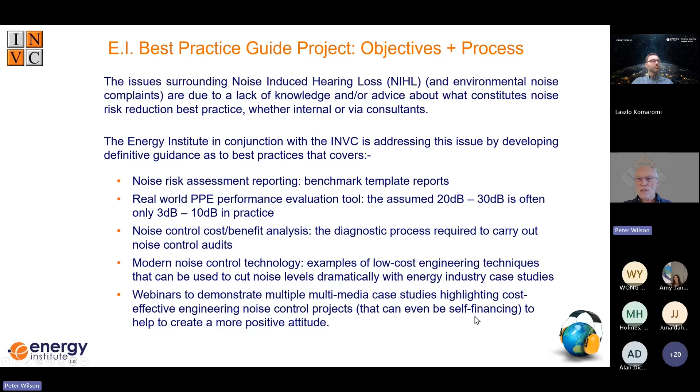Carrying out a cost-benefit analysis based on diagnosis—virtually nobody does that. And I'm going to be talking about examples of low-cost engineering diagnosis and technology that can be used. We'll also be launching webinars to transfer this technology and approach in-house.

It's time to move into the 21st century because at the moment we're still working in almost Victorian technology. There's a massive amount of urgency because of a 700K hearing damage claim recently—this is set to become more commonplace. The HSE noise inspection focus over three months has produced a 300% rise in enforcement notices. They are pushing because of new research showing how damaging noise-induced hearing loss can be.

And PPE—the assumptions about PPE are just wrong. If you're much above 90 dBA, you are in trouble as far as guaranteeing adequate protection. And environmental noise complaints are a big health risk—it is policed, and the health implications are severe.

Just to give you one case study, which I'll talk about briefly later—we did a project in the States for a big site, an oil processing site. They had a quote of $1.25 million for conventional noise control, and remotely, over email, we saved over $1 million by basing the approach on diagnosis and modern technology. And in some cases, you can actually improve efficiency and reduce running costs, which is a real novel idea.

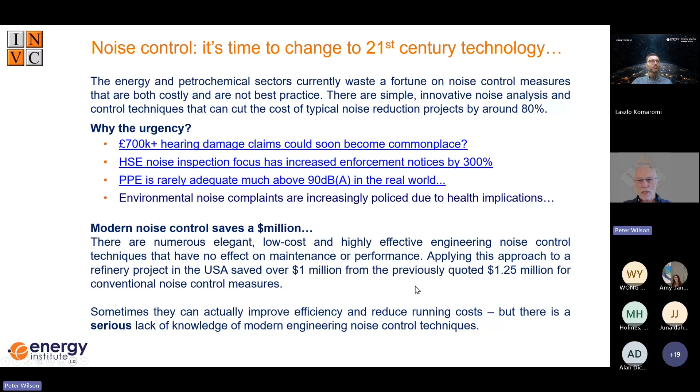So I'm going to be talking about the driver for the urgency, and then diagnosing the options, engineering techniques, and case studies. So first off...

I have to state I've got a personal interest here because my father was an army officer and he had significant hearing damage. If you have severe hearing loss, you have got 5 times the risk of dementia. And my dad died of dementia caused by his hearing loss, almost certainly, from when he was an officer in the army.

Hearing loss is the primary modifiable cause of dementia. This is based on recent research. We have a tsunami of dementia cases coming down the line, and hearing loss is a major factor in that. This is so depressing - my mum is currently dying of dementia as well. It is a horrible thing, and hearing loss is a major factor in this.

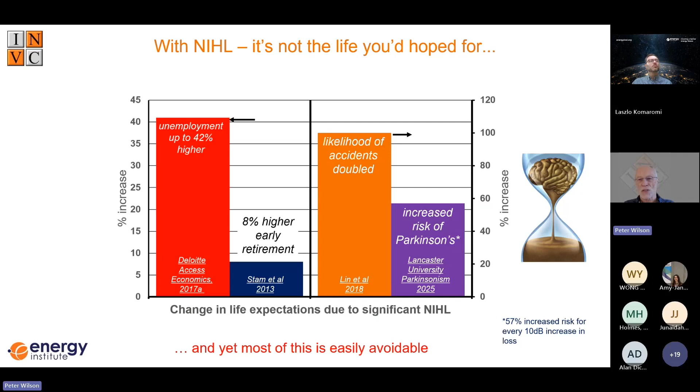Secondly, recent research shows hearing loss causes up to 42% higher risk of unemployment, 8% risk of earlier retirement, and doubles your likelihood of an accident. This year in January, recent research showed that for every 10 dB loss - which is almost undetectable using conventional audiometry - you have a 57% increased risk of Parkinson's. And Parkinson's is the fastest growing neurological disorder. So that is dramatic, and it's all based on recent research.

The second thing is that there's a new legal framework. Based on that, there was a recent court case, Ministry of Defense, and the judgment took into account the difference from the previous legal framework, which said you're not allowed to include anybody exposed below 85 decibels. Secondly, you based it all on pure tone audiometry. And thirdly, they didn't look at all the health risks.

Due to the fact that recent research has dramatically increased the known health risks specifically created by noise-induced hearing loss, you combine all those, and what the judgment said was: look, you should have known that your PPE was ineffective. The manufacturer's data was fine, but the real world data is much, much less. Currently, a part of 3M in the States is looking at hearing damage claims of over 100 billion dollars due to mis-selling of their earplugs into the armed services. That's absolutely massive - they must have known that the real world performance of their PPE was a fraction of what they said it was. Plus, the judgment also took into account synapse damage.

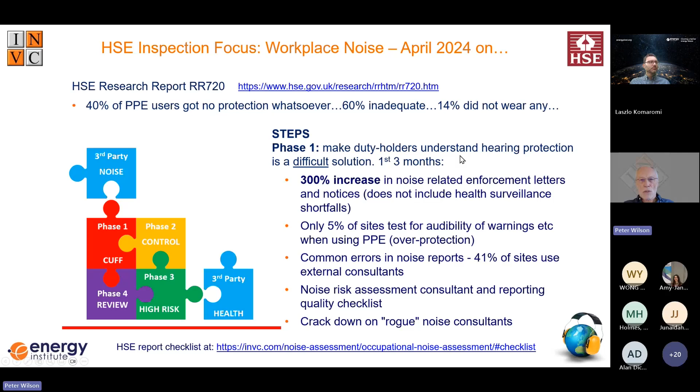There's an HSE report checklist for noise reports and so on, on our website. It's not available on the HSE website as yet, but I'm part of the committee, so we put it up on our website. Looking at PPE, part of what you get with this program is we have developed a real-world PPE performance calculator.

You answer a few questions - in this case, muffs, attenuation, wear rates, fit training, safety glasses, etc. The manufacturer says 24 dB. In fact, you're probably getting 5 dB. So this will be part of what people participating in this get.

Fundamentally, earplugs are rarely fitted correctly. So you're assuming 15 to 30 dB, and the lowest - 2 dB - is common. Earmuffs have less variation in fit, but you're talking about 10 to 17 dB. The wear rate should be 100%, but no one ever knows what the wear rate is accurately. And unless you know that, you're doomed - you have no idea the protection you're providing for people.

What that means is, our rule of thumb is up to 90 dB, because you should have compulsory hearing protection between 80 to 85, as well as above 85. The regulations don't state that, but with the new legal framework, they're now including people exposed below 85. So best practice would be compulsory hearing protection at 80.

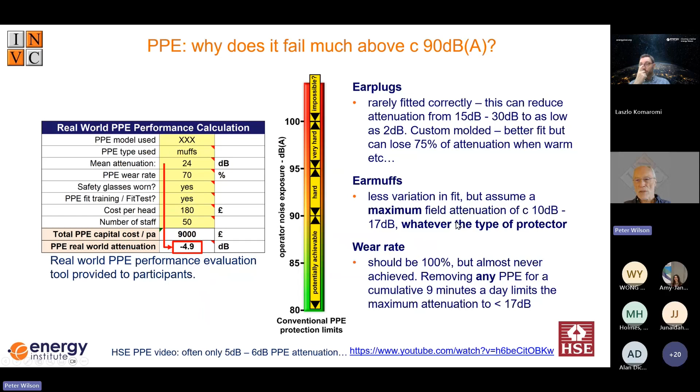As you go above 90 dBA, it gets very hard to guarantee protection. Above 95, extremely hard, and above 100, pretty well impossible without unbelievably strict conditions. There's an HSE video on this, which will be provided as part of the post sending out this presentation. They're showing 5 to 6 dB attenuation under most conditions for an awful lot of common wear conditions.

So looking at the process and the attitude, it's complicated. Some sites are incredibly complicated. And the key is diagnosis.

Some of the diagnostic techniques we use, first of all, narrowband frequency analysis. This should be standard, but isn't, for no apparent reason. I set up INVC 40 years ago. One of the first things we did was buy a narrowband frequency analyzer for diagnostic purposes. It cost the same as a car. You can now do the same with a free app, and there's information about one of the free apps that we found works very well on our website. This is a necessary tool for anyone involved with noise.

Third octaves are a waste of time. This allows you to be very, very precise about an awful lot of noise problems.

We also use acoustic cameras, which can pick up noise sources remotely without having to climb a chimney. And there's also something that probably you don't know about. This is a normal video of a compressor.

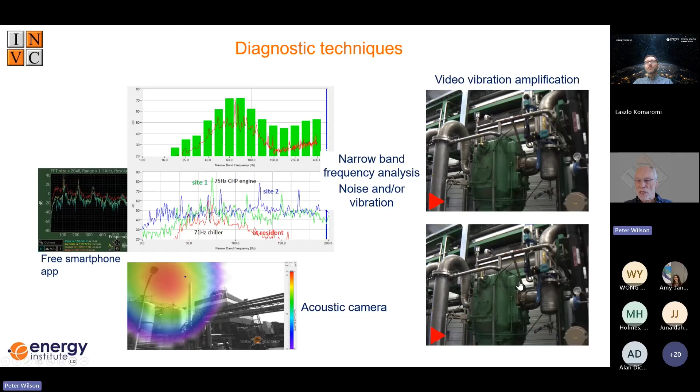If you look here, you can just see this handle wobbling. This is enhanced vibration amplification from the same video, and you can see how everything is vibrating, and you can see the patterns of vibration. Another very useful diagnostic tool.

There's massive misunderstanding associated with noise control. Hearing damage risk is directly proportional to noise dose, the amount of energy fed into your ears. Every time you double the energy, you double the risk. A 3 dB increase in noise level is double the energy, therefore it is double the risk.

An awful lot of people think that unless you can get the noise level below 85 or 80, there's no point in doing anything, because you still have to wear hearing protection. But if you cut the noise from 97 to 94, you still have to wear hearing protection, but you have halved the risk. 6 dB off is a 75% reduction in risk.

10 dB off is a 90% reduction in risk. So if you reduce it from 97 down to 87, you still need to wear hearing protection, but now your hearing protection will work, and you have reduced the risk by 90%. You document that, and the HSE will love you.

And also, there's this assumption that it's not going to be practicable, and all the cost, because of abysmal lack of knowledge. This is one of the big elephants in the room.

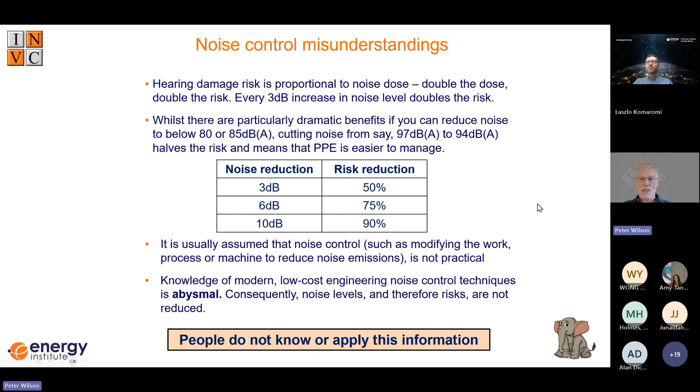The other thing is the hierarchy of control. All health and safety is based on this. This is what it should be: noise control at the top, PPE at the bottom. For noise, it's reversed. PPE is all that's assumed in almost every case, and noise control is right at the bottom due to attitude.

So our reports always have a noise control audit in there. Is this included in noise reports? Almost certainly no, it's unbelievably rare. The best you get in most noise reports about noise control is, wouldn't it be a nice idea if you could work out some way to reduce the noise?

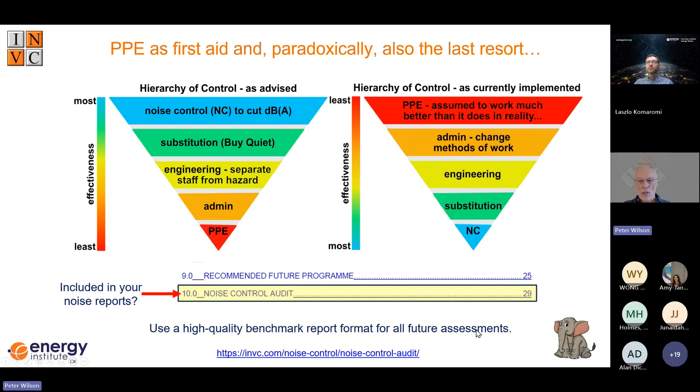And you do need to use a high quality benchmark report format going forwards. If you carry out a noise control audit, which is a diagnostic evaluation of all the noise control options, engineering and the conventional palliatives, you come up with something like this.

You have a return on investment. So you know what the noise control will cost and what the benefits would be in reduced risk, and you can compare that to the costs of your PPE risk reduction program.

In this particular site, over 6 years, in red, we have the cost of PPE. So after 6 years, it's 93K cumulative. For noise control, you're talking about a massively reduced cost, 40K. So the crossover point is 2.5 years. The financial people would love this, 2.5 year return on investment. After that, we're in profit.

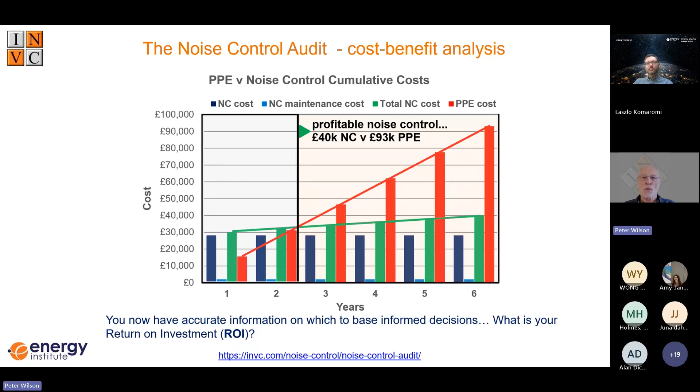But you need that information. You need to know what the options are based on best practice and what they're likely to cost and what the benefits would be. It's all return on investment. This is a real case study in the States showing you how lack of diagnosis causes dramatic problems.

This cost Atlas Power $5 million on a completely wasted project on noise control due to a lack of a 5-minute diagnosis. I saw this video online.

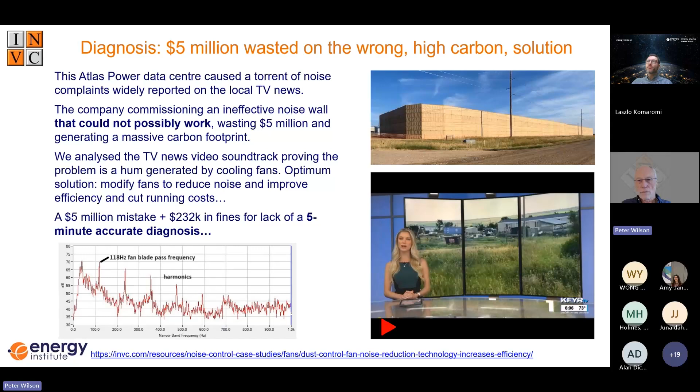The Atlas Power Data Center near Williston was granted a temporary 60-day certificate of occupancy last week after resolving several violations. Now, Williams County commissioners are watching closely to see if the company follows through on a promise to solve the excessive noise pollution in the area. Michael Anthony has more on this developing story. Could the Judson Township finally get some peace and quiet out here? Well, Atlas Power has purchased several sound walls that should be installed sometime next week.

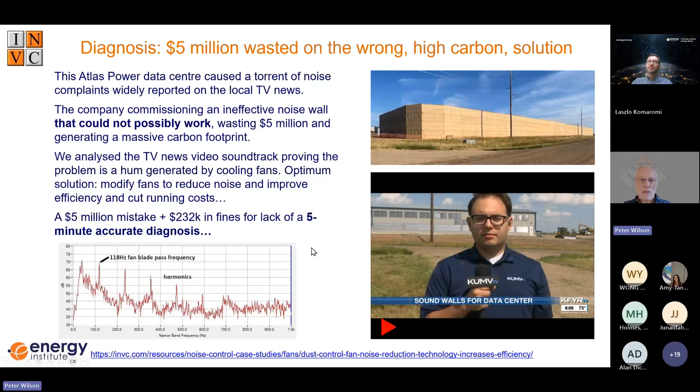I analyzed the soundtrack on that video. 5 minutes later, I said, this is the blade pass frequency of the fans. That barrier cannot possibly work because it's a very low frequency noise, and the dBA is not the problem. So a lack of diagnostic capability or approach cost them $5 million plus a 232K fine for noise. Those are the consequences of not doing the diagnosis. So if you knew what was possible, what could you achieve?

Did you know you can cut fan noise at source without silencers and increase fan efficiency in quite a lot of cases? There are also new metamaterial barriers. I've been involved in the development of these. They've got holes in them, which allow the air through but not the noise. Extremely clever and very sophisticated, but very good for cooling, for example.

Pneumatic noise, compressed air - you can get 90% reduction in air noise using 20% less compressed air. So why wouldn't you do that? You do that even if noise wasn't a problem, because it saves on very expensive compressed air.

You can also get everything proof - waterproof, acoustic absorbent, which is hygienic, weatherproof. We use that in pharmaceutical and confectionery industries as well as outside. So where you need to clean things, you can now do it. It's not just rock wool and fiberglass.

One of my favorites is sound damped steel laminate - it looks like steel, sounds like rubber. Here's an example of that. This is rugged, it's cheap, and you can create it in situ or buy it off a company in Newcastle. So 20 to 30 dB reduction, it's hygienic, it's very easy to use, and it's very, very cheap.

There's also knowledge about things that are available. Now, I may be very sad, but I love this next one. You'd think, is sellotape noisy? Well, if you've got a packing machine and you're pulling off sellotape from big rolls fast, you can get over 100 dBA. Now, the manufacturer was saying install enclosures costing you 25 grand per machine. We came along and said, you can do this.

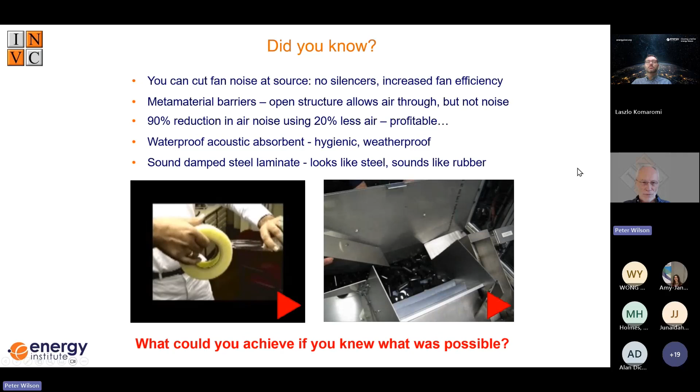Okay. I think whoever developed that, it was genius. You know, maybe I should get out more, but I think that's brilliant.

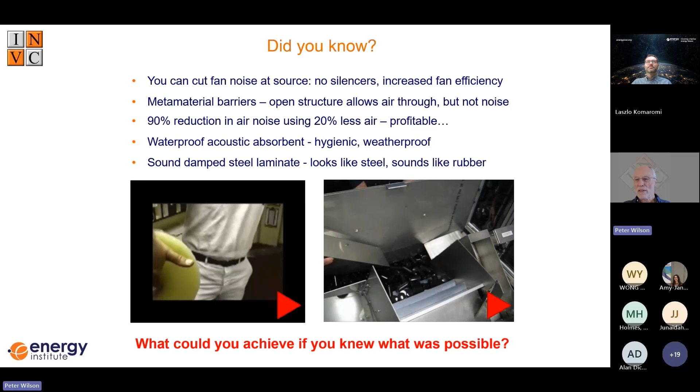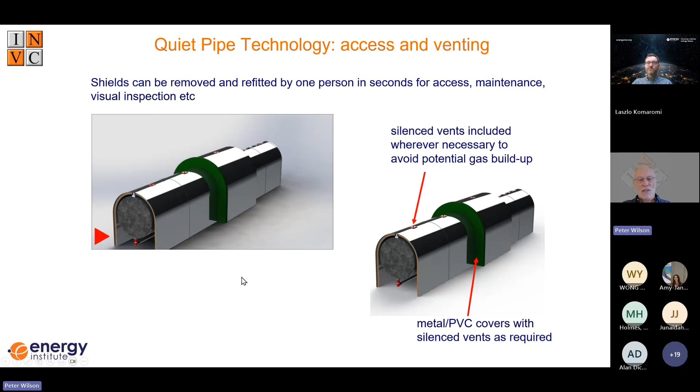And the other thing is this exact same approach reduces carbon footprint. We call it the Green Peace dividend. It's the same diagnostic approach. And what you're doing is you're swapping a bludgeon, such as an enclosure or a barrier or lagging, for a scalpel that asks what is the cause of the noise and can I fix that using engineering means?

This cuts typical noise control project costs by 50 to 80%. If you can get the noise low enough, you get rid of the waste from earplugs and muffs. Noise control structures, conventional ones, are large, using a lot of embodied carbon. The materials used, such as rock wool and fiberglass, are not easily recycled.

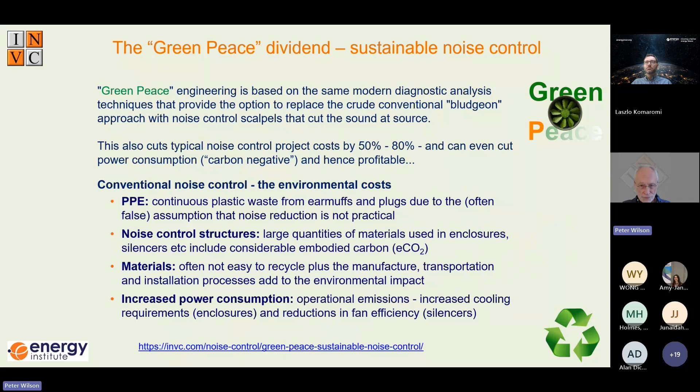We generally try to recommend recycled PET bottles as acoustic absorbent and try to use as minimum as possible to minimize cost and to minimize carbon. And also, fitting something into an enclosure probably means you need to add fans and cooling, which has increased running costs and reduced efficiency and more carbon.

It's based on diagnosis and source control technology wherever possible. If you cannot do that, then you fall back on the conventional palliatives. So you're trying to cut embodied CO2. These engineering modifications are generally manufactured locally, so you lose the transportation costs.

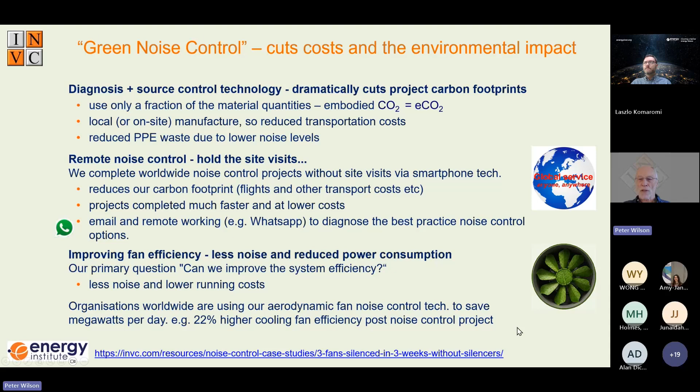We're also doing an increasing proportion of our noise control projects virtually. We do this using smartphone technology all around the world, which is faster, reduces our carbon footprint, no travel costs, no flights, no nothing. We also do remote site visits using WhatsApp. And as I said, you can improve fan efficiency in some cases, and that reduces noise and running costs. Our current record is 22% reduction in cooling fan power consumption for the same cooling.

Acoustic modeling, we do this, and a lot of organizations do this. This is an offshore rig installation model, predicting noise levels in advance, and the same for environmental noise. The problem with most models is they're all based in terms of mitigation on only barriers, enclosures and silencers, not on engineering means, so they're very limited in scope in terms of mitigation.

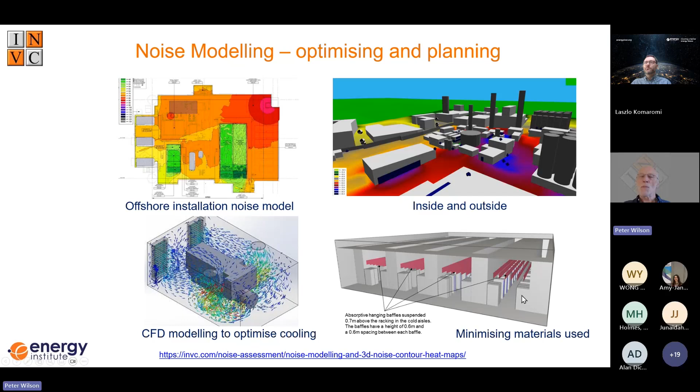We also do things like CFD modeling to optimize cooling. This is a diesel generator set. Where do you put the fans? Can you reduce the size of the fans? Instead of having 4 fans, can you just have 2 fans? And this is from a data center where we're trying to work out what's the minimum amount of material for the maximum benefit that you can install to get the noise levels down.

So a few examples of this approach in action. This is a very large motor pump, and this is the sound file. Okay, so this is the last one. This is the seawater pump. This is inside the hole on the last one.

From that, we analyzed it to produce this plot. This is a 100 Hertz high frequency tooth comb, which means it's electromagnetic excitation of the thin metal structures on this. So just from one recording, 2 minutes later, we know what the cause is. You can then use vibration measurements on the panels to work out which panels are radiating. You rank them, and then you damp them in situ. You can do that while the machine is running, for a 10 to 15 dB noise reduction. Previously, they were thinking of putting up a big barrier or even an enclosure.

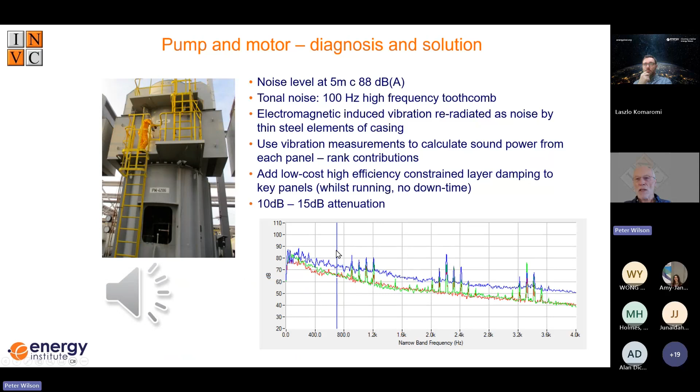Another example, this video, this is from solar farm inverters. Why are solar farms noisy? Well, transformers and inverters and fans. Traditionally, this is just tackled by people saying, okay, it's a black box, I have no idea why it's noisy. We'll stick an enclosure around it, or we'll put a load of barriers around it, both of which have implications as far as cooling. So you reduce the cooling efficiency, which means you have to run it harder and more power consumption.

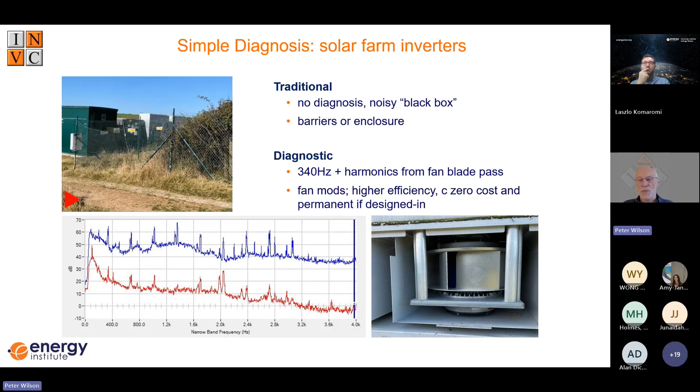Simple diagnostics off that video: it's 340 Hertz and harmonics, it's the fan blade pass. This fan, we can design retrofit modifications for that type of fan that have virtually zero cost if designed in. Retrospectively, it's more costly, but designed in, it's zero cost and actually improves the fan efficiency by 3%. So it's a novel idea of noise control that actually improves efficiency.

This is one off an alkylation plant. This is both an occupational and an environmental noise problem, 100 dBA at 1 meter. Quick analysis, we have all these tones, 1881 hertz, and a tooth comb. So you look at the details of the gearbox and say, right, from that - it's like machine condition monitoring using noise - we said it's a loose output pump shaft. Repair that, and this was confirmed by vibration measurements, 10 dBA off the noise. It's quick, very accurate and very precise. They were thinking of lagging the gearbox, which would have caused temperature problems, etc.

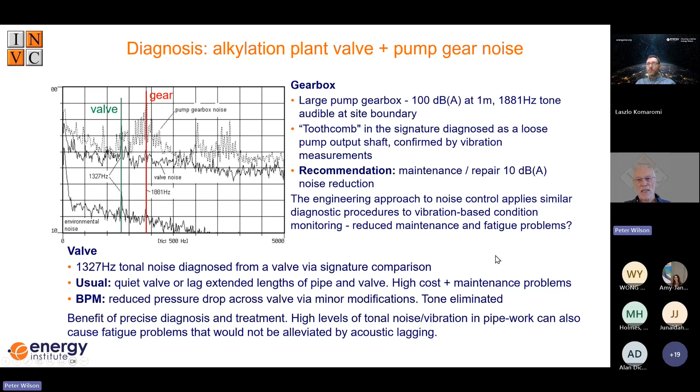Same installation on the offsite, there is a 1327 hertz tone, which is annoying the neighbors. This was diagnosed due to a pressure drop across the valve. Again, it had been suggested to replace with a quiet valve, very expensive, or to lag a massive amount of pipe. Now, as an engineer, I don't like lagging things because you trap moisture and that causes corrosion and makes inspection difficult. We worked out that the best solution would be to reduce the pressure drop across the valve with a few simple retrofit modifications, which got rid of the problem very cheaply, quickly, and easily during the next maintenance down time.

Vibration is often very closely linked to noise. With fans, you have direct excitation of the air, but with things like gearboxes, motors, pumps, etc., you're causing vibration. These are large water pumps, and in this case, it was a vibration problem causing cracking. So damping - this is dynamic vibration absorbers. You can just see it moving.

Those were retrospectively bolted on, and completely killed the vibration. It's like judo, you're using the vibration against itself.

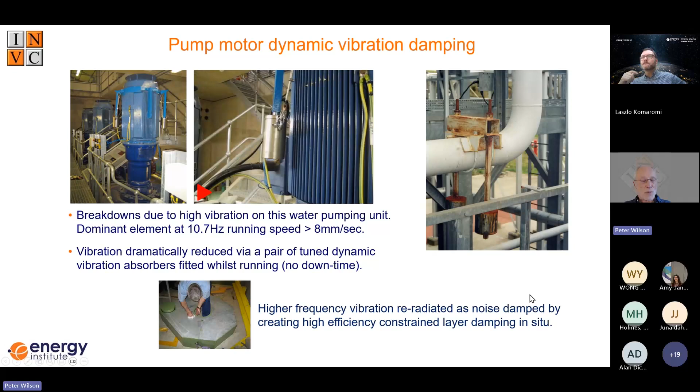This is one we designed for pipe work, which was again causing cracking. But we use similar technology for high frequency noise, and if you have high frequency noise in addition, you can create a lamina in situ.

Some examples of that - this is transformer noise. Looking at the noise from transformers, they do get hot, so they need cooling. You can't put an enclosure around it because that causes cooling problems, and you can't put a barrier next to it either, for the same reason. It would also have to be an enormously expensive and large barrier because, generally speaking, it's low frequency plus harmonics.

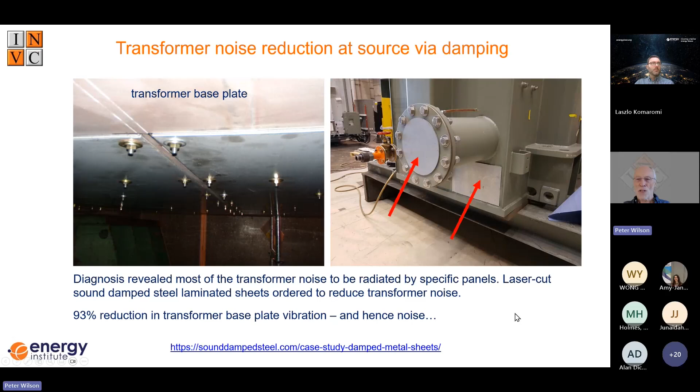In this particular case, vibration analysis showed the base plate was the major noise source, plus other panels that were radiating high levels of noise. Introducing lamination on the base plate reduced the vibration of the base plate by 93%, which had a similar knock-on effect on noise. These panels were also just vibration damped in situ. So this had dramatic noise reductions based on accurate diagnosis.

If you're looking at cladding, sometimes you do need to clad. This is an enhanced version of cladding, because instead of using standard aluminium or steel, it is laminated. This makes it very, very tolerant of any short circuits.

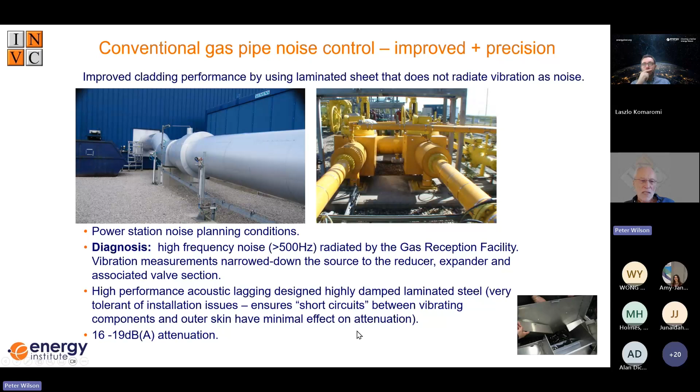Again, the key thing is diagnosis. If you get a lot of broadband noise, it's not too difficult, but if you've got tonal noise off pipework from a compressor, for example, you get standing waves, and it's very difficult to say where all the noise is coming from. You do vibration measurements so you can work out exactly how much noise is coming from each part of the pipework, and then work out the minimum area of pipework you need to damp or lag to get the result you need. In this particular case, that gave a 16 to 19 dBA noise reduction.

This is a process plant. The noise level in the area was well over 90 dBA on average. But walking around here, it's very, very tonal.

So listening to that, walking around there, you notice amplitude modulation, which means there are at least two, probably two, noise sources. The second thing is the noise level - just over 90 dBA average, but in some places it's nearly 100, in other places only 85. Those two levels can be only half a meter apart because of what are called standing waves, which are reflections. Due to that, you cannot tell by ear where the noise is coming from.

The analysis: this is the sound pressure level against time. You can see the modulation - that tells us there are two sources.

Narrowband frequency analysis shows a 398 Hertz blade pass, which matches these fans. If you zoom in on the blade pass, you can see it's actually the two fans running at very, very slightly different speeds because of different loads. Then you can say, okay, aerodynamic noise control will cut the tones by 20 dB and completely solve the problem.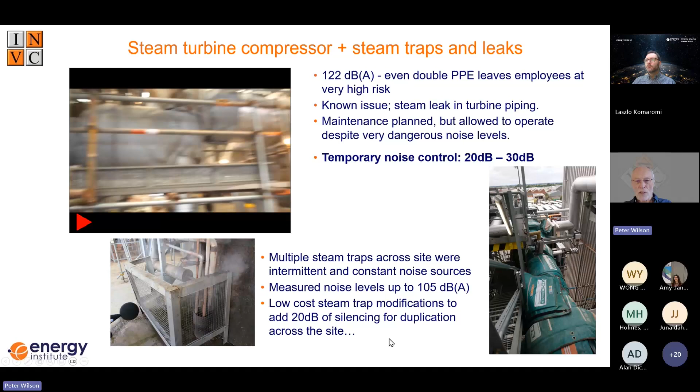This one - okay, which bits of kit are the problem? Analyze it, you can see the tones. You ask, well, which fan or blower has a blade pass frequency of that, and harmonics? Aerodynamic modifications will kill that dead without any modifications to the externals.

If we're looking at the sort of modifications we're talking about - fan speed - the first thing we do when looking at anything to do with blowers or fans is ask, can we make it more efficient? Because fan noise is proportional to the fifth power of fan speed, a small reduction in fan speed or improvement in fan efficiency has a massive effect on noise. So a 20% reduction in fan speed reduces risk by a factor of 3. A 50% reduction in fan speed, you can dream, reduces the risk by 15 dB, which is a factor of 30.

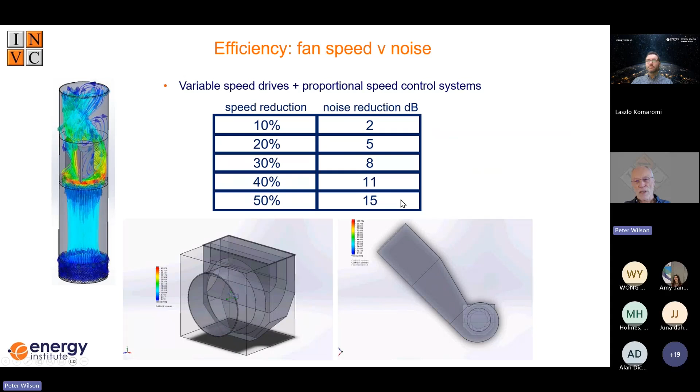So these are cooling tower noise control based on the same approach. We've developed some very innovative modifications. These things are 7 meters in diameter, you cannot fit a silencer on them. We got 8% improved efficiency - you can run the fans at lower speed for the same flow with reduced wear, 6 to 10 dB noise reduction. Retrofit gearbox modifications give another 5 to 10 dB off the gear noise. So again, this is an engineering approach based on good diagnosis.

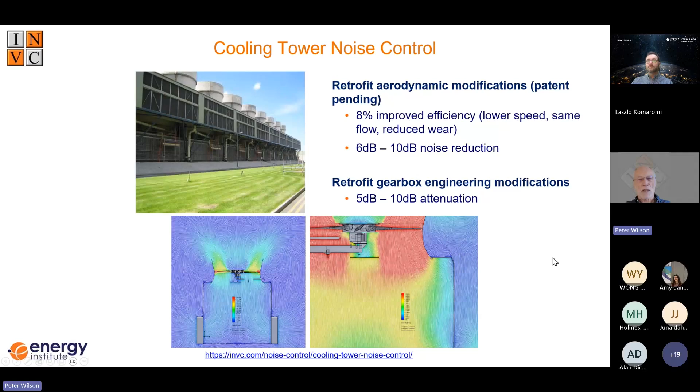This is the largest biomass power station in the States. They contacted us because they'd had a conventional silencer fitted, which reduced their fan efficiency by 20%, so they had to take it off. They were desperate. So this is what it sounded like before and after treatment. The annoying hum has been dramatically cut. The thing that impressed me most was this fan is the size of a house, and they did it in a 12 hour shutdown. It actually reduced power consumption compared with a naked fan - that's not counting the 20% loss they had with the silencer previously.

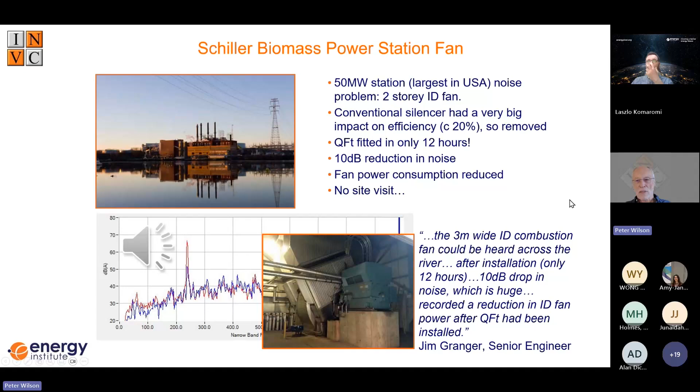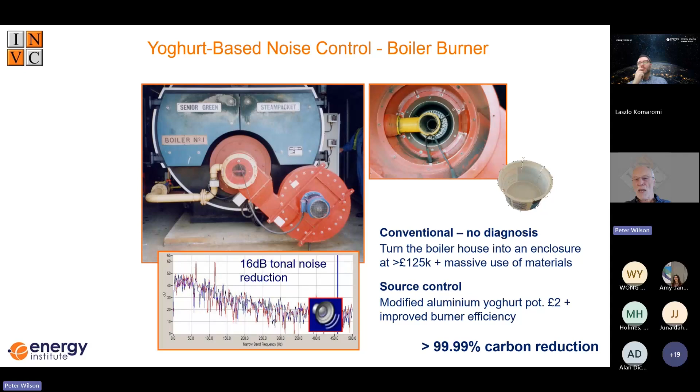This is a really odd one - I just like it because I'm a bit weird. These are boiler burners, 3 of these. A consultant said you need to turn your boiler house into a bunker at eye-watering expense, hundreds of thousands. My colleague went along and said, I think it's a mixing problem. Have you got a yogurt pot? So they went to the canteen, ate a yogurt. He then modified the yogurt pot like Blue Peter, fitted it onto the spare unit which was down, problem solved. So they just run these 3 with aluminium, cut down yogurt pots installed, which basically improved the mix of the gas air mixing and slightly improved the burner efficiency too.

Oh, blackcurrant, by the way.

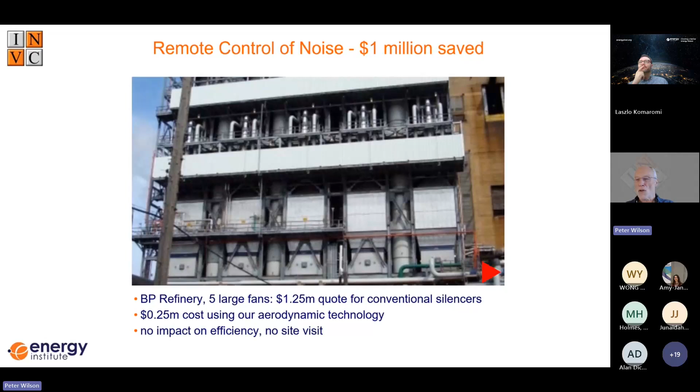So this is a BP refinery - this is the one I talked about, $1 million saved. The local consultant sent us the data, sent us some noise files, sent us the details of the fans. Aerodynamic modifications killed the problem dead, saved them $1 million out of a $1.25 million quote for the conventional approach.

And we do this all around the world. We have a massive database of engineering solutions, so we've come across most problems in some form or other. People will send us videos, and we will take a quick look, run it through our database and say yes, there are options. I've been doing this for years - I set up INVC 40 years ago. I can walk through any site pretty well and point at a bit of plant: easy solution, easy solution, easy solution. I need to study that one, that's a bit different. That one, you are doomed.

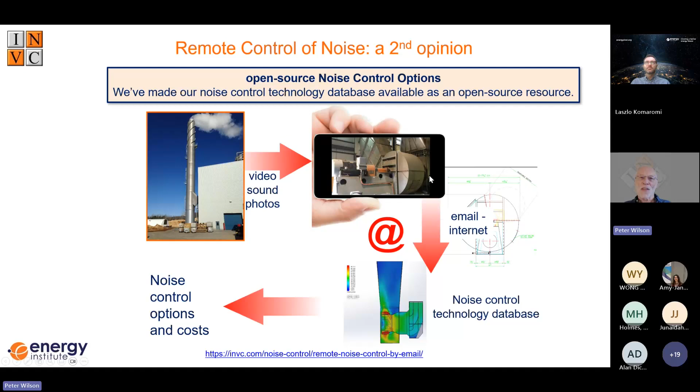You have to have an enclosure. If you can't fit an enclosure, then there's no options - you have to use PPE, and I will give you a 'you are doomed' certificate to say you can use PPE in perpetuity. So initially this is a free service that we offer anywhere in the world.

The same applies to purchasing policy - there's no point in reducing noise on sites if you then buy very noisy kit. The key takeaway is, don't allow your suppliers to spend your money on noise control without close scrutiny. You want to see what diagnostic process they went through. If they haven't got that documented, they have guessed. They are spending your money on things that are not best practice. They are buying stuff in, marking it up and selling it on to you. Most suppliers have no technical expertise in noise, or very little.

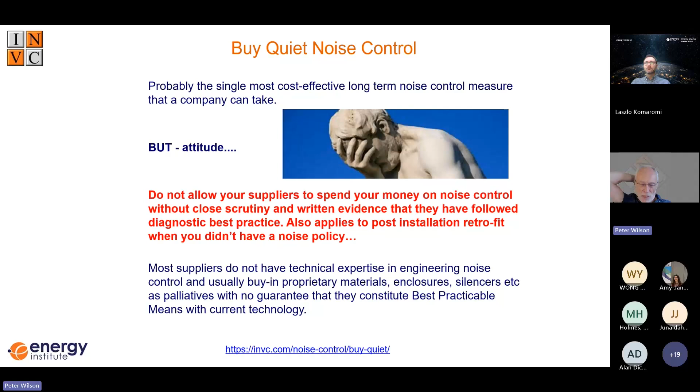If you're looking at big sites and planning for things like data centers, petrochem installations and so on, you do all the modeling and stuff, but it's all based on not enough information from suppliers. Some of it's based on guesswork, and almost none of it is based on engineering noise control options.

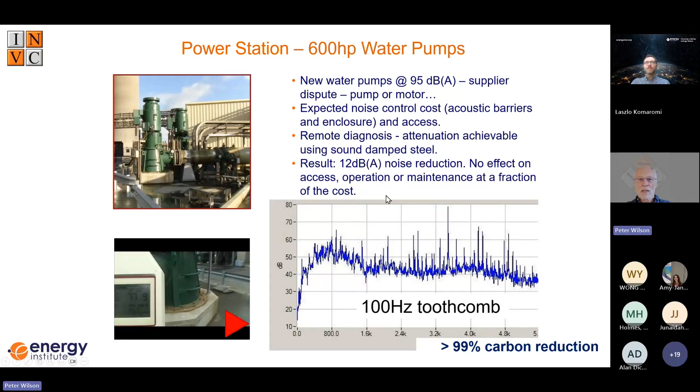So this is a 600 horsepower water pump. Purchasing policy said less than 85 dB at 1 meter. It was over 95. The motor supplier blamed the pump supplier, who blamed the motor supplier, and this was going legal. They sent us that video. We did the diagnosis and said it's the thin panels radiating electromagnetic vibration. Damp those, 12 dBA off, no effect on anything - solved the problem very, very quickly and easily.

Now, the Control of Noise at Work regulations say thou shalt not use PPE long term unless you can prove that you can't cut the risk by other measures. That is almost universally ignored. So it's a regulatory requirement to carry out a noise control audit to say what are my noise control options, what would the cost be, and what would the risk reduction be. Then you can make sensible decisions about risk reduction programs.

This approach is easy to train engineers in. You can use an app, and there's some knowledge about materials and the diagnostic system.

So once you've got your noise control audit, which tells you what your options are, what the costs would be, and what the likely risk reductions would be, you can then plan and implement the best options. And even where you can't get below 85 or 80, you're still reducing the risk so the PPE is more effective, and the HSE will love that. And if you can get below 80 or 85, then you revise your PPE requirements.

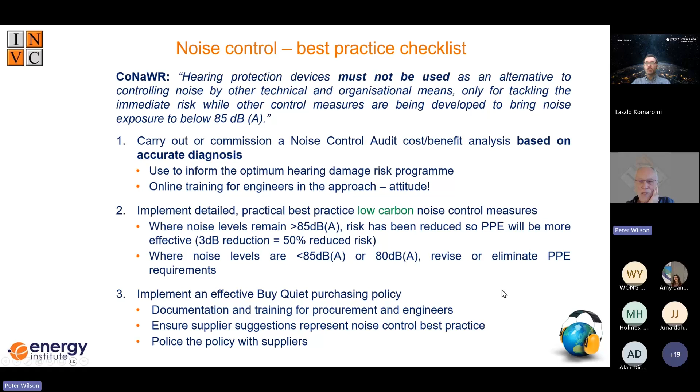And the same thing needs to be implemented in the purchasing policy. You need documentation and training for procurement, and make sure suppliers have done the diagnostics, and they won't have. And police the policy, because it's going to cost you money if they introduce new noise hazards into your site.

So I have never come across a company who've actually done a proper return on investment as far as noise is concerned. So here are the things you need to think about.

What's the actual daily wear rate in noise hazard zones? What's the actual employee field protection you're getting? Not 20 to 30 dB, probably only 3 to 10 dB. You need to know that.

You need to know wear rates, unless you're using the very new, what we call intelligent PPE, which automatically measures that. And how much do you spend on PPE and risk management per annum on average? Virtually nobody knows that. That's one figure. You can do the likely real world protection from by joining this program, because we will be supplying a tool to do that.

Secondly, noise assessment and health surveillance. You do need reports that include an action plan that includes noise control. Most reports are fairly poor quality and largely placebo reports that tell you what you already know, that you do have a problem and it's exactly this big, and nothing on noise control, or very little.

So how much do you spend on that and audiometry? You need to switch from conventional audiometry to otoacoustic emission, which will give you feedback within a year if someone's getting damage. And ultimately...

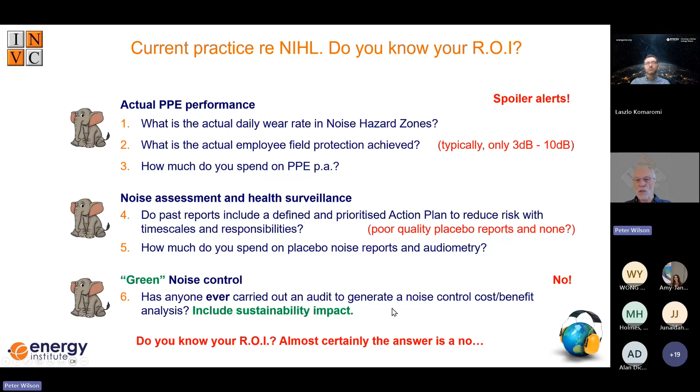You need to carry out noise control audits to say what would be the cost of noise control and what would the consequences be, and you're including sustainability impact on noise control measures. In other words, embodied carbon. You need to know what your return on investment is going to be. There are a whole load of links on the presentation that will be sent through to give you more information.

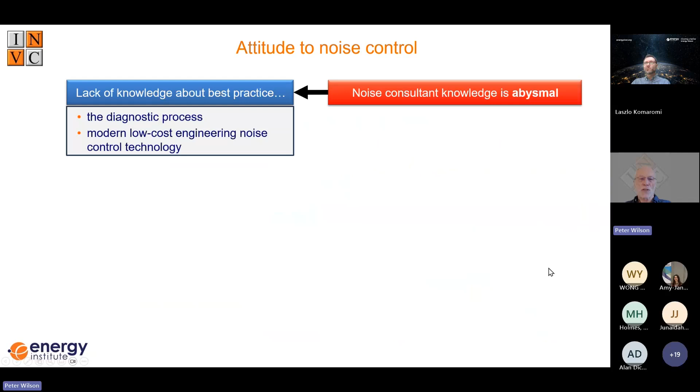So summarizing, we're looking at the attitude to noise control, which I talked about. And you can't depend on noise consultants, very sadly, because their knowledge of modern noise control and diagnosis is awful. The assumptions, it's not just enclosures and things, so you need to change. The biggest problem is the assumptions about how difficult noise control is, how costly it's going to be, and how much hassle. That is not necessarily true.

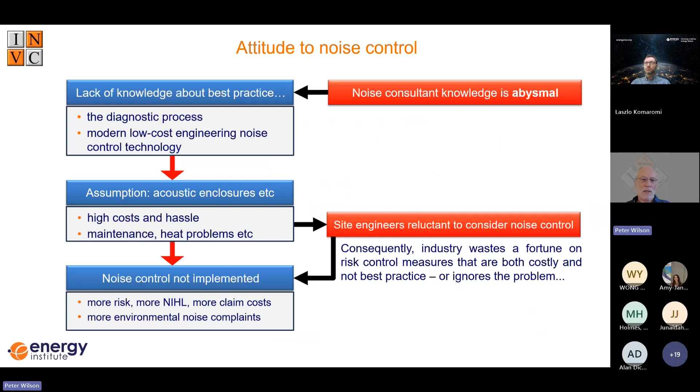So, finalizing, big impact on costs coming down the line, already happening. HSE noise inspections, legal changes, and the massive increase in risk posed with regard to dementia, etc., which has been identified by recent research. So this health costs, huge claims and insurance.

The good news is, so that's the bad news, if you like. The good news is, by implementing best practice in reporting, audiometry and noise control, you can reduce noise-induced hearing loss by between 75 and 90% at negligible or no cost compared with current practice. And noise control is a very key element of that.

So looking at the risk and green dividend, most noise control projects, by using a diagnostic approach, you can reduce the cost by 50 to 80% and reduce the carbon footprint involved using modern technology. It's long past time to change.

I find it just so depressing. In the 40 years, go to most sites, nothing much has changed. And yet the technology has moved on, as I say, from narrowband analyzer at the cost of a car to something you can do for free on an app.

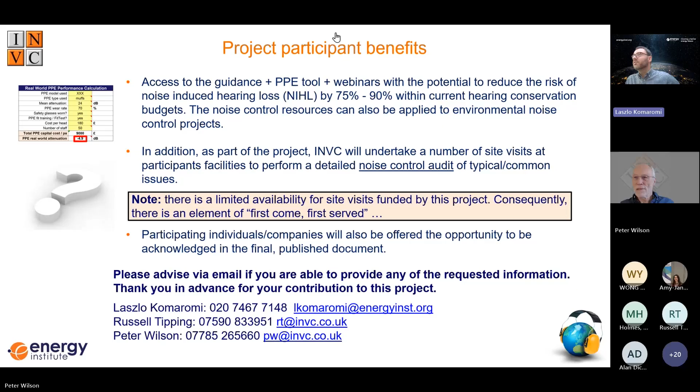Yeah, it kind of blows my mind that sometimes the solution is really simple, yet companies go for the typical expensive off-the-shelf solutions, which in many cases are even less effective than some of the more cost-effective ones. So yes, Chris was trying to make comments.